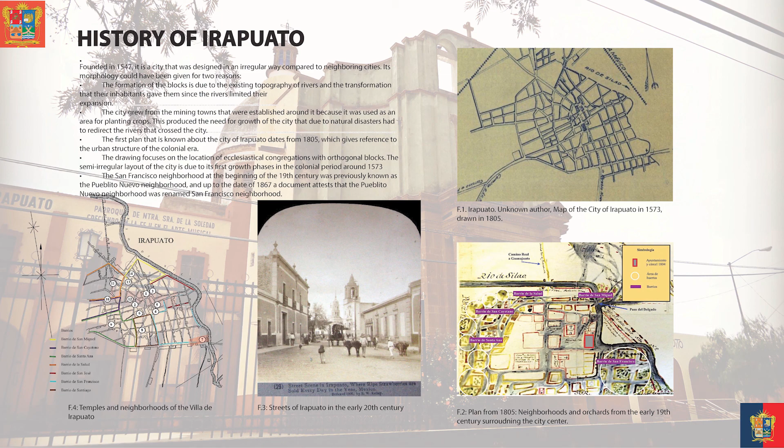Irapuato is located in the central state of Guanajuato and is historically known for its agriculture, to the point of being known as the capital of the strawberry. Founded during the colonial era in 1547, the city was designed in an irregular shape due to the existing topography of the river Silao. The idea behind this project is to repopulate and repurpose the existing historic buildings of the city centers of Mexico by applying this typology.

Since the beginning of the millennia, there has been a strong growth in the development of affordable housing in Mexico. The so-called sinister paradises are attractive but distressing landscapes that strip individuals from the surrounding nature and isolate the homes in a sea of concrete.

By looking at the existing city center of Irapuato, we can see that there are 276 buildings that are considered historic, but sadly, 57 of the historic buildings are abandoned.

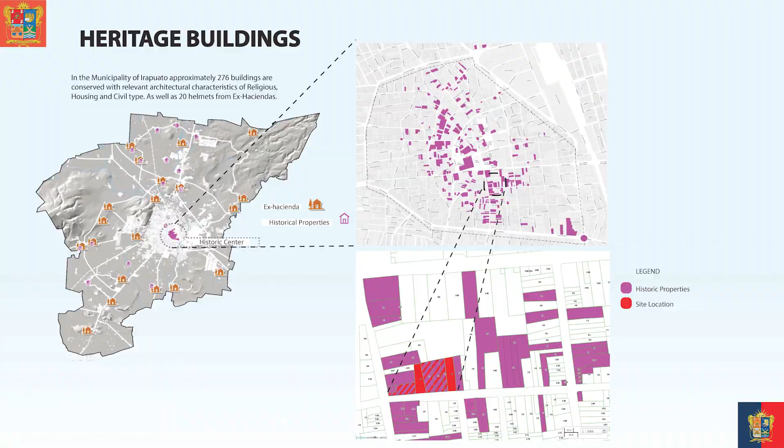The site that I chose is inside the city center, between the Barrio San Francisco and Barrio de Santiago.

One of the many advantages of the site is that it's at a walkable distance from many amenities in the city center. It's perfect for someone that doesn't have a way of transportation like a car.

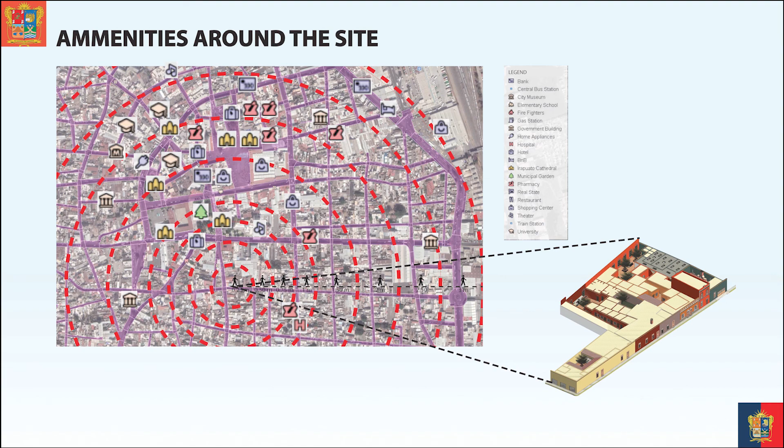The site will be divided into 3 different buildings: a museum, a co-living space, and a cultural center. Each building was designed to repurpose and rehabilitate this section of the city center.

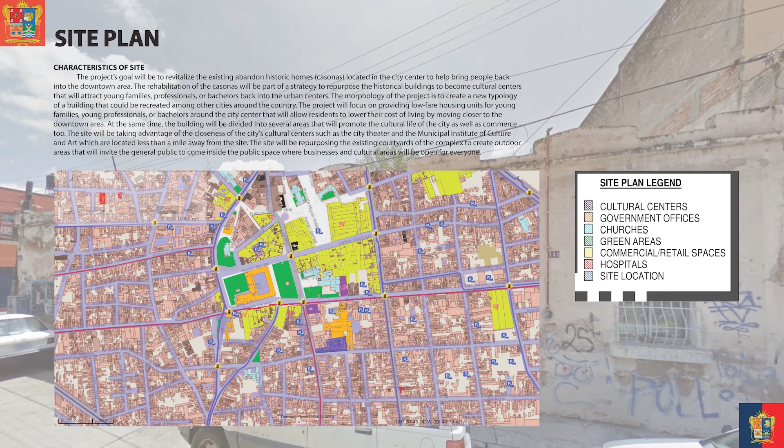The morphology of the project is to create a new typology building that could be recreated in other cities around the country. To make the site attractive for the general public to visit the space, I rehabilitated the existing courtyards

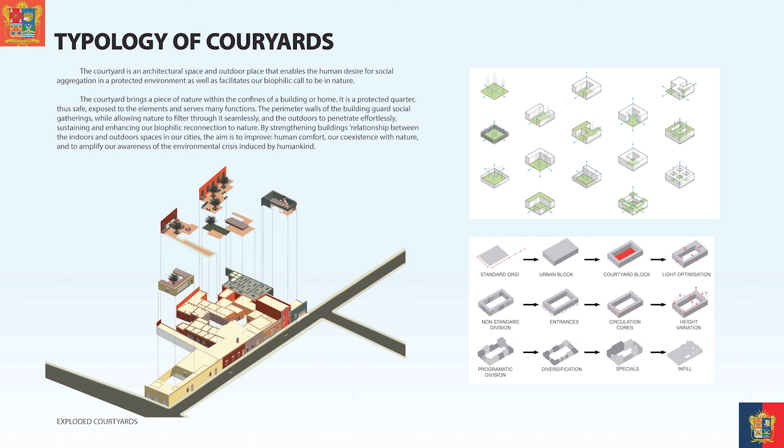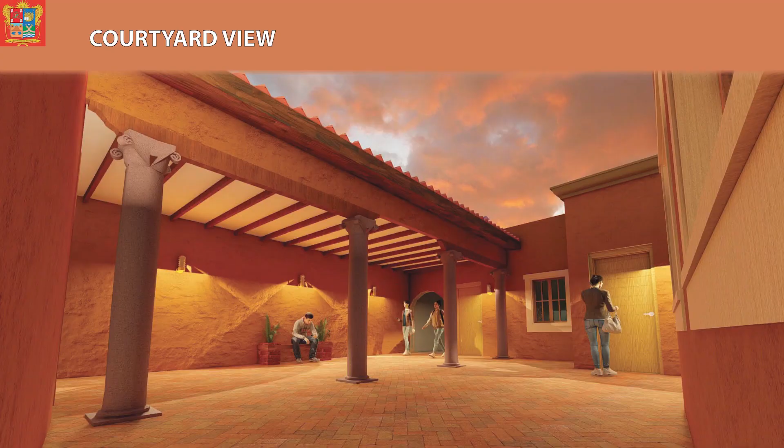to be used as public open spaces for social interaction to happen. The resident space has 3 different courtyards that residents can use at will, and at the same time, they facilitate the sunlight and the wind to enter the entire building.

On the other hand, the museum has 1 central courtyard available to visitors, while the cultural center has 2 main public courtyards.

On this axonometric view of the building, it is possible to appreciate what sections of the building are open to the sky.

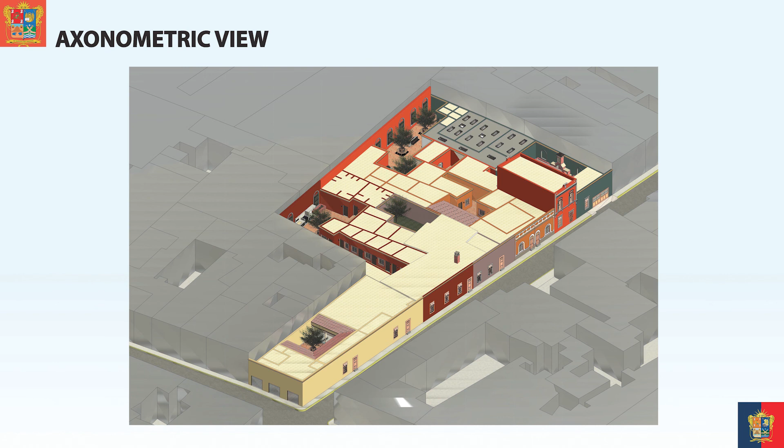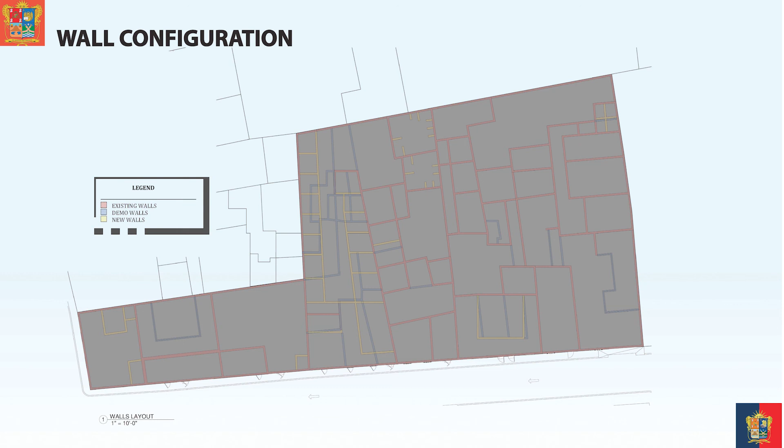Working on a historic preservation project, I cannot demolish or change any of the exterior walls, but when it comes to the interior walls, it is allowed if the wall is in bad condition, or the new project can salvage the existing wall and relocate it.

The co-living typology is meant to redefine the 9-to-5 schedule by trying to reinterpret a more working-life balance, where we understand that no cubicle will satisfy human needs, and freedom of living is always on the go.

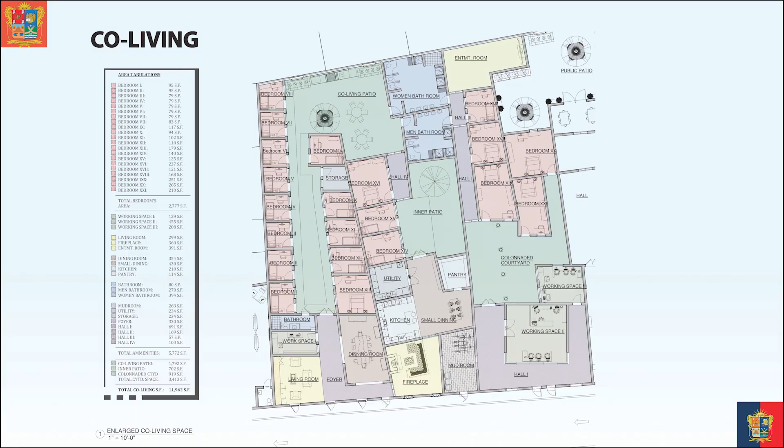The co-living space will provide low-cost housing units to young professionals, young families, or bachelors. It is not meant to be a long-term stay, but rather an aid for people to have a head start in life.

There are a total of 14 individual rooms at a price of $200, or 6 double rooms at a price of $350 per person.

The following section gives us a better understanding of the co-living space main area, as well as other areas such as the living room, the garden, or the co-working space.

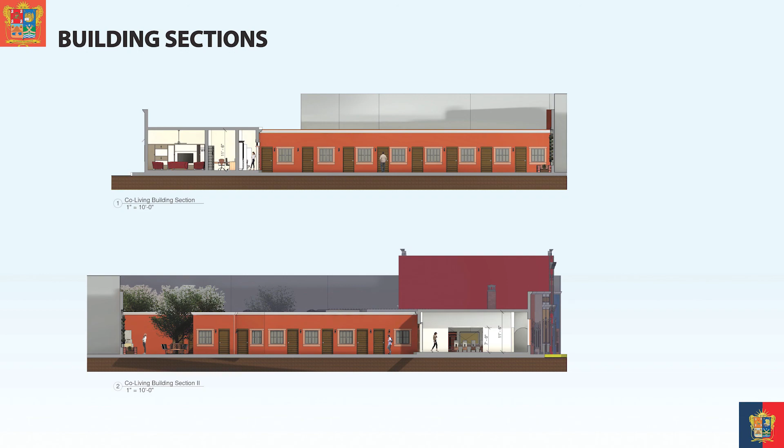The co-working space is located on the opposite side of the property. This allows the residents to have more private space for them to focus on work.

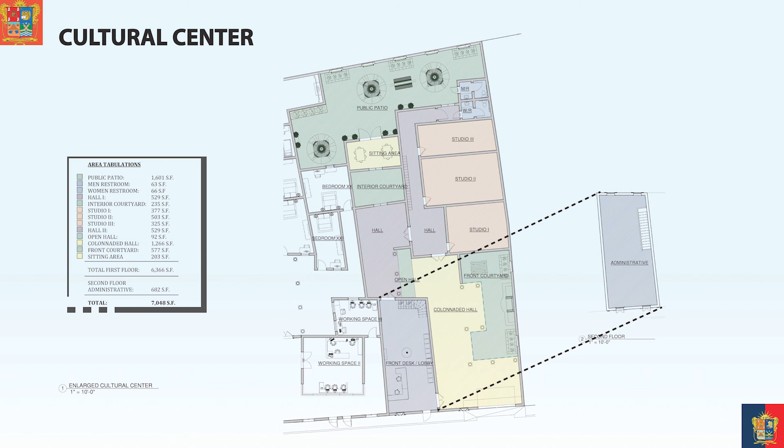The Cultural Center is meant to be one of the 2 main attractions of the site for the general public. This is meant to be an extension of an existing cultural center that is located on the opposite side of the block.

To create a better experience for residents and visitors, the use of native plants in the courtyard areas is crucial, and this will help create a better environment that will correlate with the existing building.

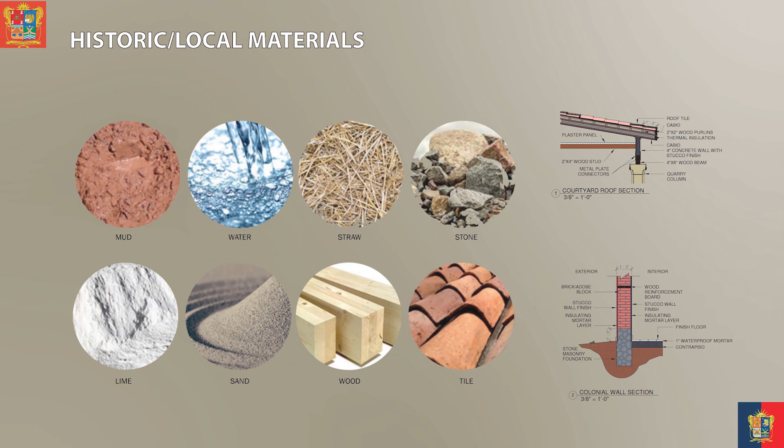One of the things we know is that when they built these houses back in the 1700s, all of the materials were basically local, materials that can be found in the surroundings. The walls were mainly made out of brick, stone, or tapia pisada, which is layerings of mud.

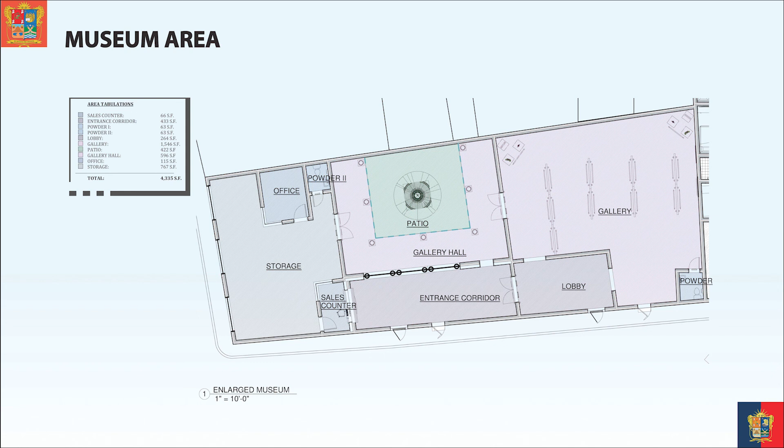The final piece of this project is the museum area, where it's meant to be used by local artists or artisans to expose their work in the exterior or interior galleries that this museum provides, to bring a more cultural experience to the city of Irapuato.